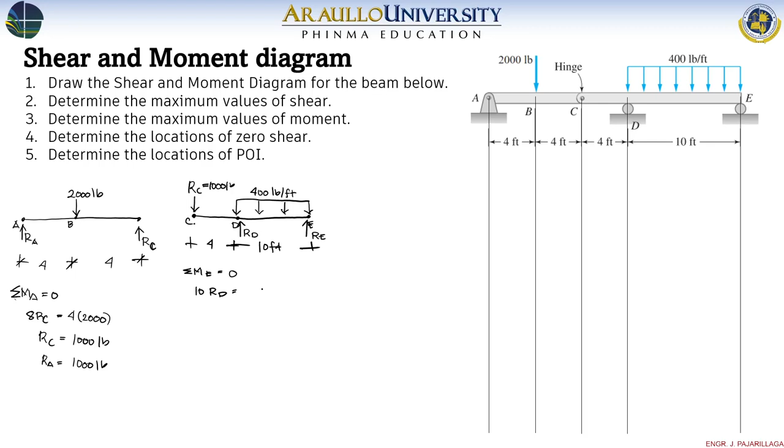And for the dimensions, we have here 4 feet and then 10 feet. We have an upward reaction at D and an upward reaction at E, RD and RE. Similar approach kagaya nung kanina, we can take summation moment at E equal to 0. So 10 RD is equivalent to 14 times 1,000 pounds, plus the 400 pounds per foot multiplied by its length 10 feet.

And since this is a distributed load, magkakaroon ito ng resultant here, and kung rectangular yan, kalahati nito, or that is 5. So the moment arm of our distributed load is 5. Here we can solve for RD equivalent to 3,400 pounds.

And by summation of vertical forces equal to 0, RE is equivalent to 1,000, plus 400 times 10, minus the reaction 3,400. So RE is... uy, nangyari, na-multiply... 1,600.

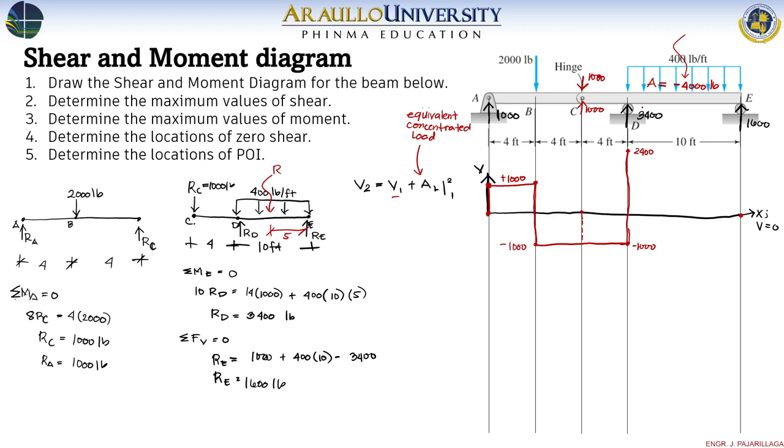Now, at this point, meron tayong distributed load. So, it is important to find the equivalent concentrated load here, or the equivalent concentrated load is actually the area, where in this case, this is 400 multiplied by 10 or negative 4,000 pounds. So, if we want to find the shear at point E, before point E, at almost point E, that would be 2,400, the value of the previous shear, plus negative 4,000, the area of load from D to E, or the equivalent concentrated load. So, ang maiiwan sa atin is 2,400 minus 4,000, we have here negative 1,600.

So, since the degree of this load is 0, therefore, here we have a degree of 1. So, a degree of 1 is just a slanting line. Basta slanting line yan. Okay? Now, at exactly point E, there is a positive 1,600 load. So, from negative 1,600, magdadagdag tayo ng 1,600, closing out our shear diagram. So, this is now our shear diagram.

So, kung ang problem lang is involving the creation of the shear diagram, or ang tanong lang sa inyo is draw the shear and moment diagram, the easiest way talaga to do that is the graphical method. However, if the questions involve the determination of locations, medyo nagiging complicated minsan si graphical method. That is why wag niyong kalilimutan pa rin yung method of sections pagdating sa shear and moment diagram sa pag-create ng equation.

Now, before we proceed with the moment, there is an important point here. Yung tinatawag nating points of zero shear. So actually, there are 3 points of zero shear here. Now, bakit importante yung points of zero shear? Because according to the relationship between the shear and moment, the location of the zero shear is also the location of the maximum moment. Pero hindi lagi. Now, kailan nangyayari na yung location ng zero shear ay hindi location ng maximum moment? When the beam is subjected to an external moment.

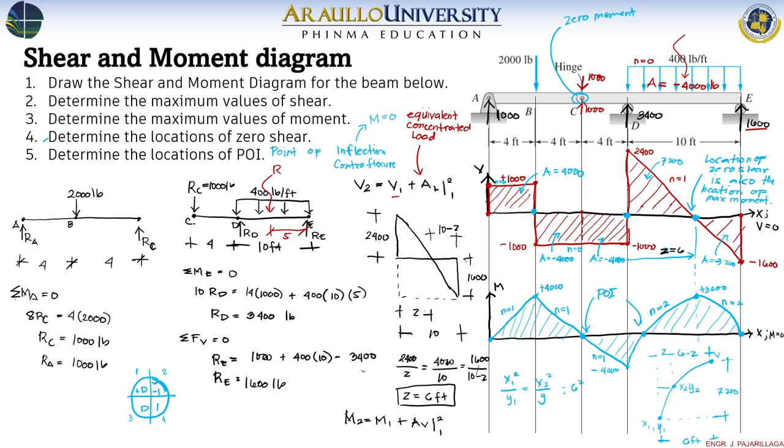Okay? So, if this is the Z, therefore, this is 6 minus Z. So, if we apply the squared property of parabola, according to that, that would be x1 squared over y1 equal to x2 squared over y2. Applying this to this one, we have x1, which is 6 feet squared. Okay, in-apply ko lang, divided by its length na 7,200 equal to 6 minus z squared divided by this one, from here up to here is 3,200. So parabolic yung pinag-uusapan natin, this parabola, so this one is 3,200.

Okay, so you can use transposition, you can use shift solve, either way pareho lang yan ang resulta. So that would be 6 squared over 7,200 equal to 6 minus z squared divided by 3,200. Then, shift solve na lang para medyo mabilis. Pero kung nakakanon ka, huwag mo sayangin yung oras mo. I-transpose mo na lang. So, here we have 2. So, this is 2 feet.

Okay. Now, if we want to solve for the values for this problem, since ito yung tanong sa atin, let me just clear this area so that we can have a room. Okay, so ilagay ko na lang dito, saan ko ba pwede ilagay? Wala na eh. Ang liit kasi ng space. So, dito na lang. Then, positive, negative. Okay, this is 1, this is 2, this is 3, this is 4. Now, let us find the values na hinahanap sa atin ng problem. So, the first value na hinahanap niya,

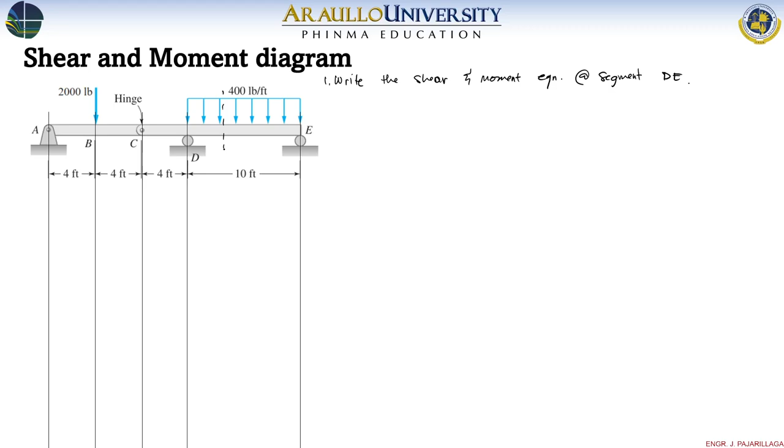Now, if the problem is very specific, na segment DE lang, hindi mo na kailangang hanapin yung mga natitira dito. Just isolate this segment. Kunin mo lang yan. I-cut mo lang yung segment DE. Now, pating segment DE, what we'll have is a beam na putol. We have here our point A. Then we have here our load 2,000 pound. And then we have the internal hinge. And then we have the point D with a reaction.

So, let me just write the reaction. This is 1,000. This is 3,400. And here, we have a distributed load of magnitude 400. Now, in order to find the equations, we can find the shear equation by taking the summation forces vertical. And for the bending moment, we take the summation moment at the point of cutting. So, kung saan ka nag-cut.

Okay. So, since ang tanong sa atin ay segment DE, then the limitations of X are, kung ito yung point na yan, dapat mas mataas yan sa 12. Hindi pwedeng mas mababa sa 12 kasi hindi na yan segment DE. So, this should be greater than 12. But, dapat hindi rin mas mataas or equal sa 22. Kasi pag equal sa 22, point E na yun. Pag mataas sa 22, hindi na yan part ng beam. So, this should be greater than 12 but less than 22. And this is your segment DE.

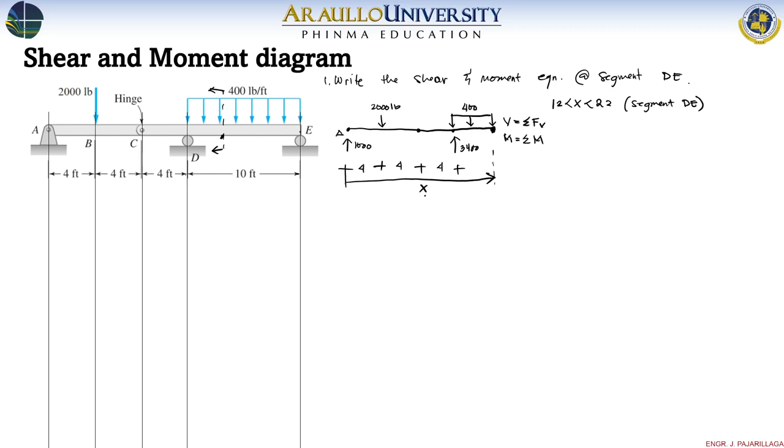So, since my limits of X are an inequality, the length of the beam is X. And ito ngayon is defined values since ito ay already known. This is 4 feet, this is 4 feet, this is 4 feet. Now, applying summation forces vertical to find the shear equation, we'll have V is equal to the upward force 1,000 minus 2,000, okay? And then may another positive 3,400. And then meron tayong pababang load. So that would be a negative 400 multiplied by the length.

If this is 12 feet and this is X, therefore yung matitira dito is definitely X minus 12. So the length of this uniformly distributed load is X minus 12. So applying this, we have 1,000 minus 2,000, so negative 1,000 plus 3,400. We have 2,400, then let us distribute this one, so negative 400x, and then 400 times 12 is positive 4,800. So our shear equation is 2,400 plus 4,800. So that is 7,200 minus 400x. So this is the shear equation for this one.

For the moment equation, we have, magugutom na ako.

For the moment equation, we have here 1,000 with a moment arm of x. Then we have minus 2,000. Ang moment arm niya, if this is x, minus 4. Okay? Bawasan mo ng 4, di ba? So this is x minus 4. And then we have 3,400, that is positive. Then that is x minus 12.

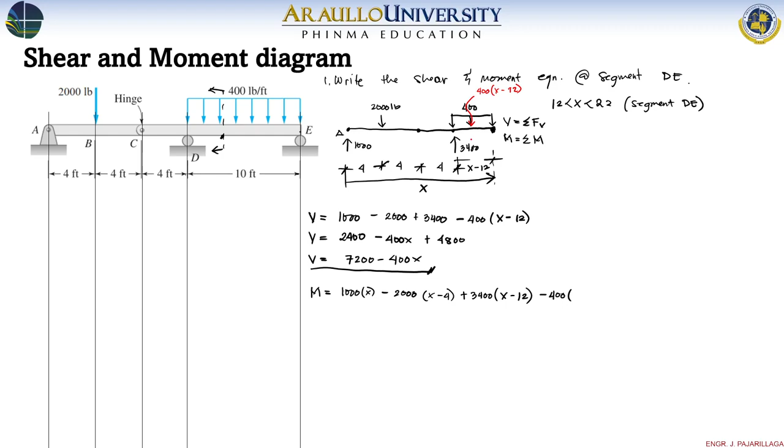Since rectangular ito, the moment arm would be kalahati. So, x minus 12 divided by 2. Okay? So, in this case, ganyan yung gagawin natin. So, determine the magnitude. That will be 400 multiplied by x minus 12. And then, our moment arm is x minus 12 divided by 2.

So, here, the moment is 1,000x minus 2,000x plus 8,000, 2,000 times 4 plus 3,400x minus 40,800. Now, ito actually, pwede ko na itong i-expand. So, pwedeng ang gawin ko dito, yung 400, i-divide ko na sa 2, i-expand ko na to.

So, this will be 200 multiplied by, pag in-expand ko yan, di ba yan ay x minus 12 times x minus 12, or pag dinistribute ko, that is x squared, x multiplied by negative 12, so negative 12x, ganun din dito. So, plus 144. So, if we distribute this, this will be x squared minus 24x plus 144. So, i-apply natin ngayon. Ito na yung kukunin natin dito.

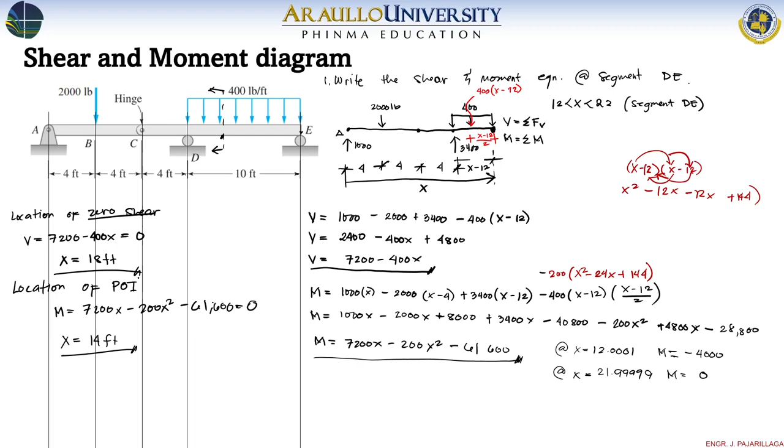Then, shift solve natin. Dalawa yung ibibigay na value. Yung isa yung 22 na limit. Bakit? Kasi dito sa segment DE, dalawa talaga yung zero moment. Kasi ang binigay sa akin ay 22, definitely hindi ito 22. So, hanapin natin yung mas mababa. Let's say, assume 0 tayo. Then, the value of x here is 14. So, x is equal to 14 feet, which is also aligned with our shear and moment diagram. So, that would be the answers for this problem.